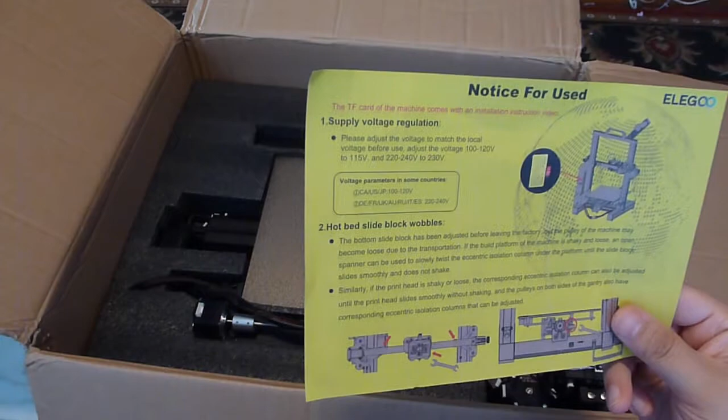Now this tells us about Elegoo's auto leveling for the Neptune 3. Notice for use: please adjust the voltage to match the local power use - adjust voltage 100 to 120, to 115 volts, or 220 to 240, to 230. So it's got an adjustment on the power supply. And it's telling you what happens if the hotbed wobbles and what you should do.

So here is the bulk of our 3D printer here. Let me just take a look at the user guide here and see what we're dealing with - precautions, machine parameters, and then you got your packing list here. We'll take a look at that.

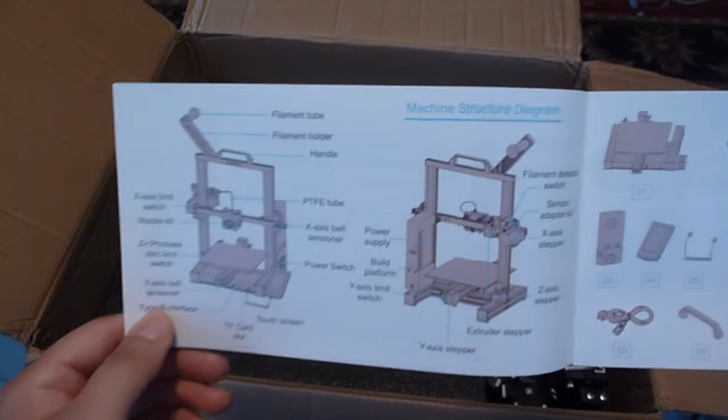Oh wow, they actually give you screwdrivers and Allen keys and everything. So I think everything I need here, other than the scissors to open the box, were included. And you'll see that's what it looks like when it's all put together. Hopefully it won't be that much of a pain to put together.

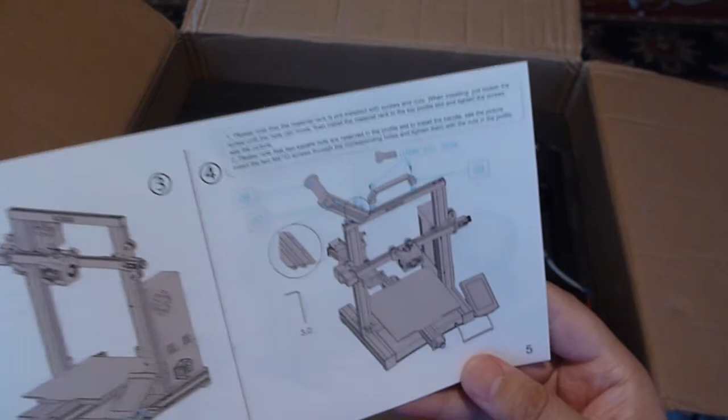Machine installation: the TF card of the machine comes with an installation instruction video. But it looks like before turning on the power supply, be sure to check the voltage, just like it said before. Yeah, it looks like we basically just have to put the top part on the bottom part, and then put the power supply on, put the screen on, and then the various other bits. So let's get to that right now.

So I'm going to get over here and see how we're going to take this out of the box. If I recall correctly from other videos I've seen on YouTube, this kind of has to be lifted out. Okay, that's a little moving bit that I didn't know about. Let's see, this has to be kind of lifted out, and then the foam has to be kind of taken out maybe. Okay, here we go.

Get this foam out of here, throw it over the side. And I think the rest of this just kind of lifts out like this. So you're going to put this on the couch here and get the box off the coffee table, and then we'll try to put our printer together. So get this over here - clean that up later. And behind the camera here, where you're not going to see, I'm going to try to get the rest of the printer out of this foam.

Maybe. Well, let's lean the top part - you're not seeing what I'm doing. Oh, okay, cool. So this is what we got.

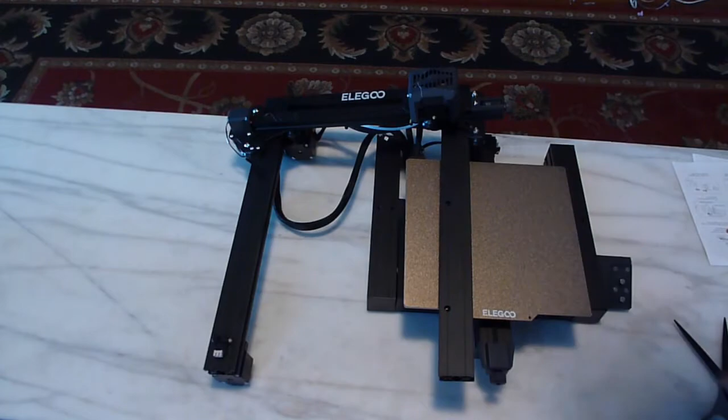And I'm going to look in the actual... let's see if there's anything here. I think that's everything, yeah, this is just a bunch of foam. Yeah, there's nothing on that. I just want to make sure there wasn't any extra little doors or anything on that.

Also, while I'm at it, I'll get the power supply out of that top foam block and throw that aside. Yeah, it looks like the power supply just connects with this little guy here, which I'm sure there's a matching one somewhere on the rest of the printer, so let's get rid of that.

Oh, I know what that was. That was the little block of foam from the thing, the little block of foam that was holding... I'm just gonna come down a little bit so I can kind of see what I'm doing here on camera. But the little block of foam that was holding in the screen kind of just fell out.

But we're gonna look at our accessory kit here, which I think holds just about all the screws and whatnot that I need to put this thing together with.

So here is your 3D printer filament sample. This is just 5 meters of white PLA. That's not much. A few zip ties.

Here is a metal putty knife. This is for like scraping your prints off the print bed.

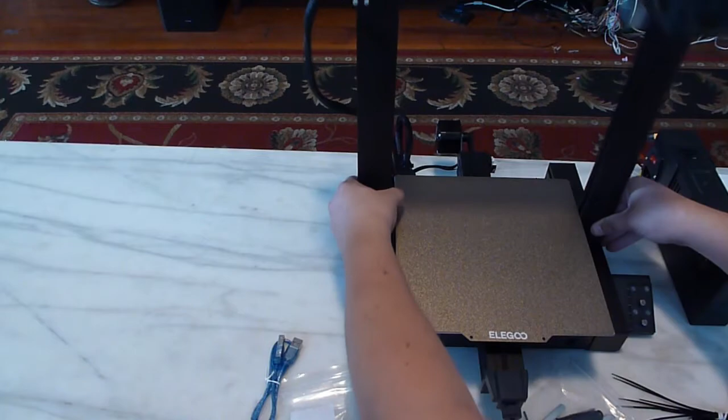And I seriously don't want to kill the thing my first time out, so I'm going to be very careful here. Because the last thing I don't want to do is have that whole assembly fall down and just break.

Yeah, I got this right because if you see in the manual here, it shows this bit here, and then that little knob there, and you see little knob there, this little bit here, and yeah, it looks like we got that all set up.

I don't know why this got a little bit of snot coming out of it. It's just a string, I guess. Okay, we're okay. Probably something in the manufacturing process, I guess.

So now let's just see what screws we have to use to put the thing together.

Okay, oh, I'm sorry, I didn't mean to bump you there, but... 4 pieces, HM5*45. So let's open up our little grab bag here and see which ones those are.

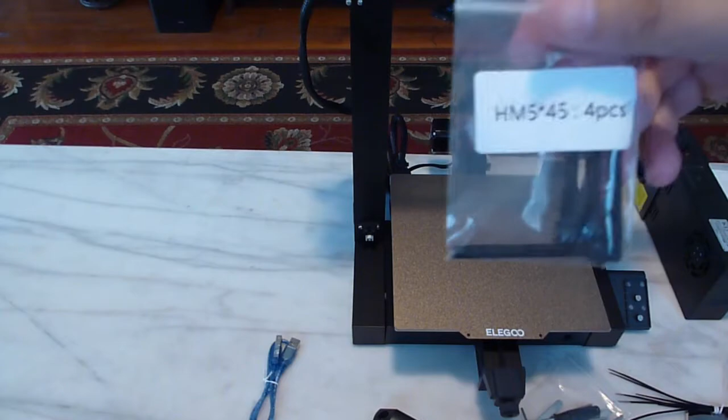Oh, I see, they actually have them bagged as to each step. So here is your ones for putting the printer together.

And let's do our best to do this and not totally ruin this thing before we get out here. So I think what I'll try to do is turn it on its side.

And let me just see which Allen key I'm using in this tool bag, which honestly, it's not common to buy something and actually get all the tools you need for it with it. Yeah, there we go, that one will do it.

So why is it all weird on the other side? I don't know, I guess it still works. Maybe it's just hard to get into the place.

And I know this area here is where the screen attaches, but that's just a little plug and it plugs into the thing. Oh, and on the front here is where the SD card goes. It's a micro SD card, I want to say.

So let's get this, I'm going to put it on the side like that. Get the whole deal here. And do the same. And just kind of see if I can get this together maybe.

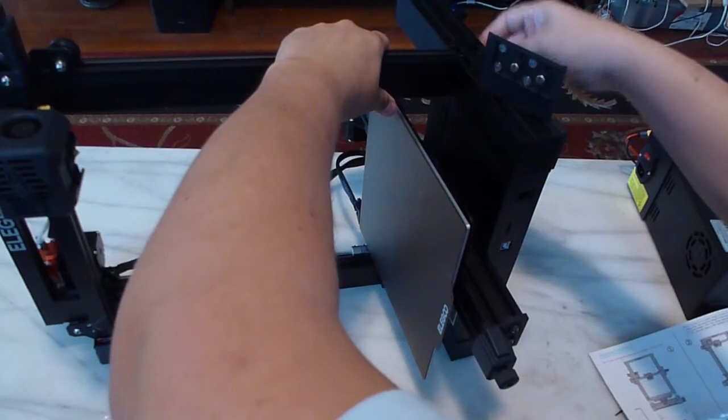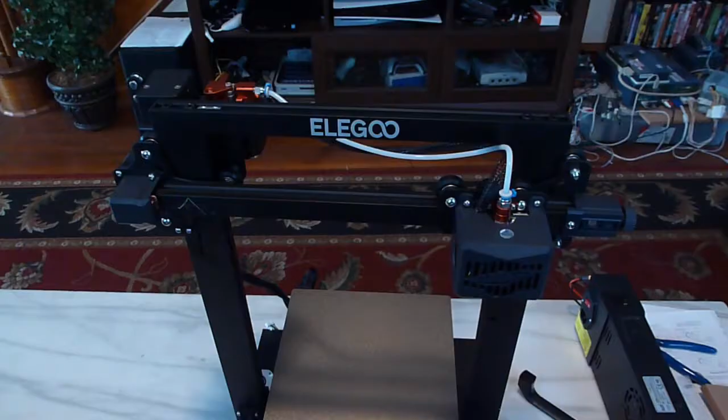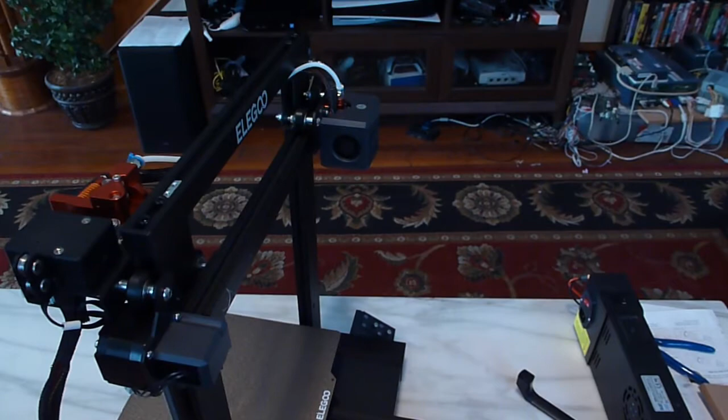Okay, now that I've gone ahead and tightened the screws for the frame off camera, I think we might be missing a rubber foot here or something. It just seems kind of... doesn't seem quite right. Maybe it's missing a rubber foot that came off, or maybe one of our cords is getting kinked. Let's see. Oh, okay. Yeah, now we're good. We're not sitting on anything.

Now, going from there, we have to take the power supply and put the 2 HM18s on. HM18s, I gotta find those somewhere here. Oh, here's the rest of our pieces. So we just get the bag that's 2 HM18s, which are these. Then you take this side here without the fancy servo gears and stuff, and that's where the power supply attaches. So it's here.

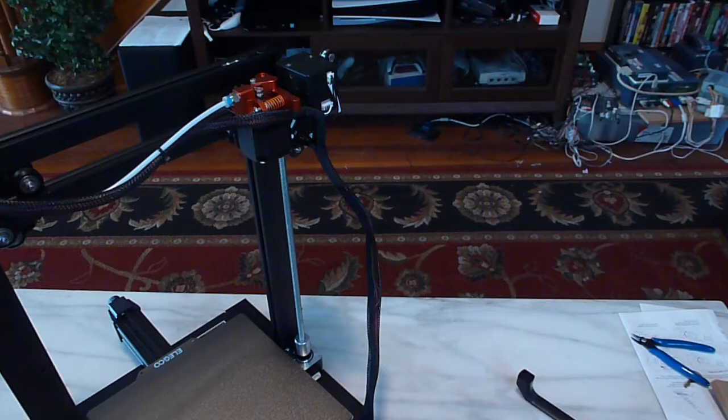Let me see what side of this actually attaches there. This is our power supply. Okay, it's definitely this side. Is it like this? Yeah, that's what it shows. So I guess you gotta have your power plug over there, and then this kind of just goes here.

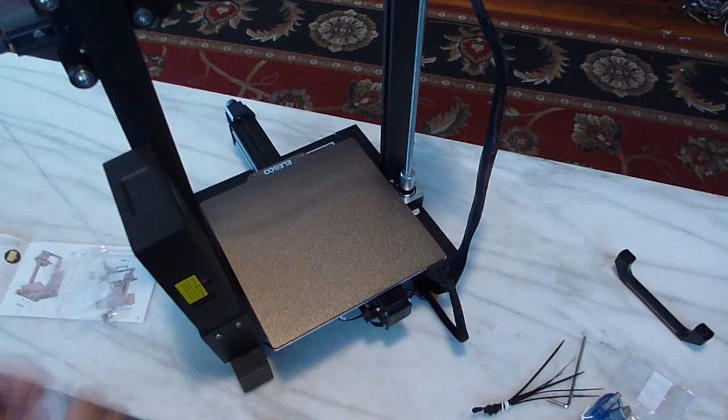And let me try to get those screws in. Hopefully it's not going to be such a problem like the beginning part was. But yeah, there's our power supply that I'm attaching now. This is probably going to end up being a very long video, and I'm probably gonna have to edit it down to multiple videos doing this. But let's see, put it through the thing here and see if it actually lines up with the power supply. See if these are this? No, different Allen key for those. Let's see if it's Allen key number 2. Yes, okay.

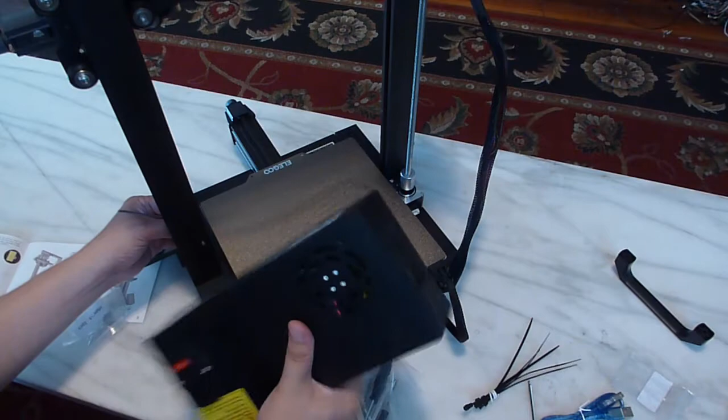And just put the screw in and hope that the screw hole actually lines up here. Okay, we actually got 2 of them here, but I'm guessing it's the further out one, because the further out one is on the top. So let's try to do that. I think I got it. Yeah, I definitely got it. And let's just get the other one in and we'll tighten them both up.

If I didn't drop the Allen key... wait, this doesn't seem right. Okay, well there are screws on the other side too. Let me just see if I'm doing this right. It looks right according to the picture. But let me just make sure I'm doing this right, because you don't want to do your initial assembly and end up doing it all wrong. So let's see if this screw goes in. Yeah, it does. Okay, got to do it right. Good.

Okay, so screwing in a power supply. And now the other screw, all the way in. Good. Now let's see what's next. Just following directions here because I don't want to completely mess this thing up.

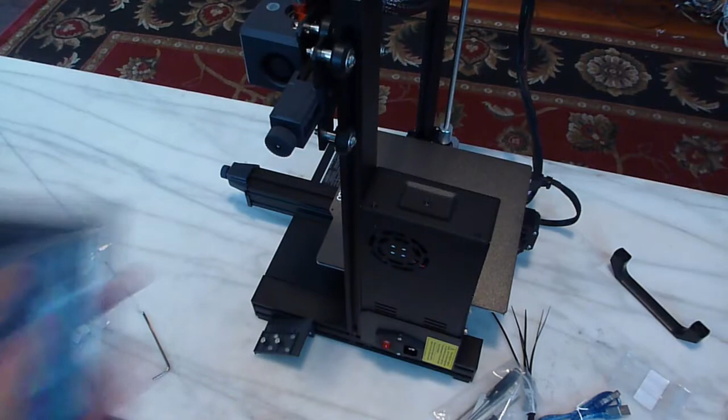Okay, now we just put on the touch screen. Here's our touch screen here, so all we gotta do is move the printer around here and peel off the little deal here. Put it in its cradle here. Is it? Yeah, it's down. In its cradle, and then plug it into like the phone cord thing here. And now that's installed. And what's next?

Okay, looks like now it's got me installing the spool holder and the handle. So here's our handle. And let me get those 2 pieces for the spool holder here. So here's our spool holder. And it looks like this bit goes like this. Let me see.

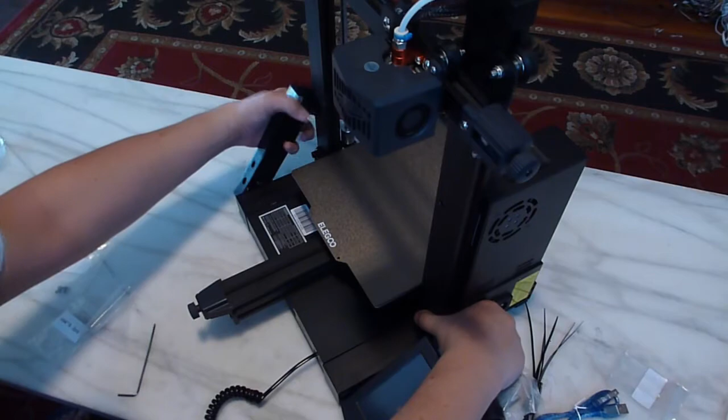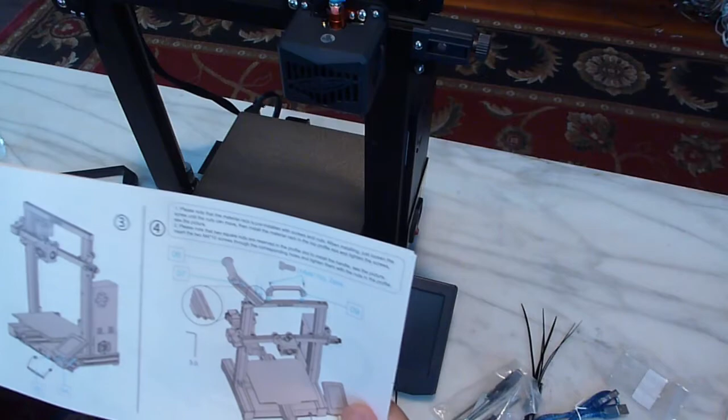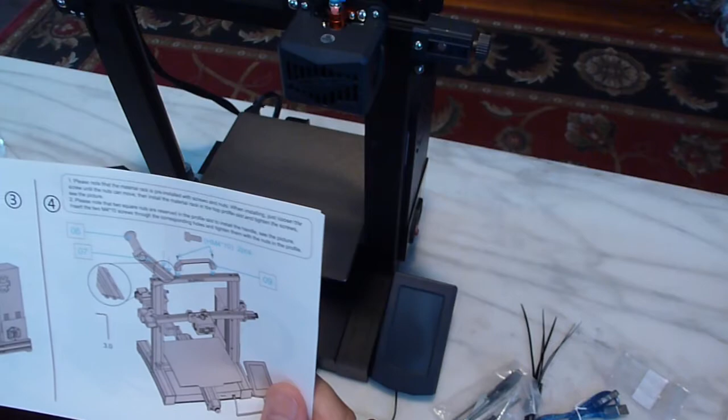I just want to make sure I'm doing this right, that's all. So we're gonna move this to the front. And what do we got to do here? It's got a bit of an actual instruction here. Please note that the material rack is pre-installed with screws and nuts. When installing, just loosen the screw until the nuts can move. Then install the material rack in the top profile slot and tighten screws as you see in the picture.

Okay, well let's get the handle first, because that's kind of easy. That's got our M4x10s here, M4x10s, here we go. That's probably the small Allen key, because, you know, why use 2 types of screws when you can use 3? Here, little screws here. So let's see. It's probably not going to be this one, right? No, it is. Okay, so let's look at the top of the printer here.

So, yeah. Oh okay, maybe those are your ones for the... and then what does this do? I don't get it, let me see. I'm just trying to understand what they're doing here. So it says here... I'm trying to understand, because I'm looking at the top of the printer. I see 2 screws on one side, 2 screws on one side, 2 screws on the other side, and then there's these like slidey nut things in there.

Please note that the 2 square nuts are reserved in the profile slot to install the handle. See the picture, insert 2... okay, so those little sliding nuts there are for the handle. So let's do the handle now, and then we'll figure out the other thing. So, handle goes here. And at least I can kind of see through that, so it's not going to be a struggle to get this on. So just 1 screw here.

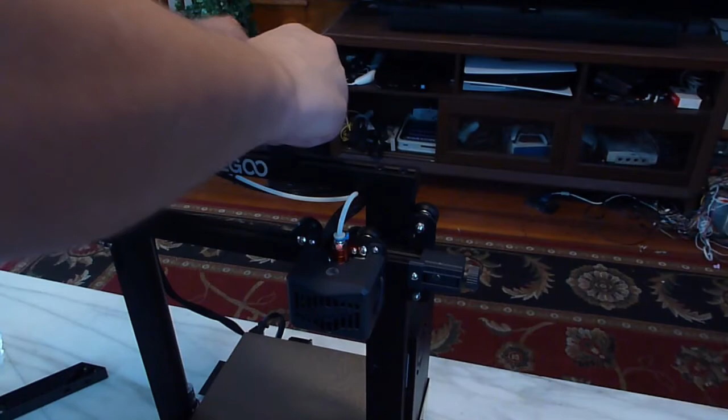Maybe... okay, yeah, it did catch. We'll loosen it up so I can move it a little bit and then get the other one in. Other one in, hopefully.

You'd think they would have had me attach all the cables and everything before I put the handle on. But hey, however they want to do it, I'm not going to tell them how to live their life. There we go, handle is on.

How in the world do I do this thing? Oh, I see, they're just having you, if you see these guys here, loosen those and put those in there. So let's go ahead and give that a shot.

Basically what these are is, if you remember when I put the handle in, it had these guys kind of sliding in there. So you basically have to loosen these, get them into the slot there, and then tighten them in, and that's how it works, I guess.

Why they didn't pre-install these in the slot like they did the ones for the handle, I don't understand, but hey, whatever you guys want to do is fine with me.

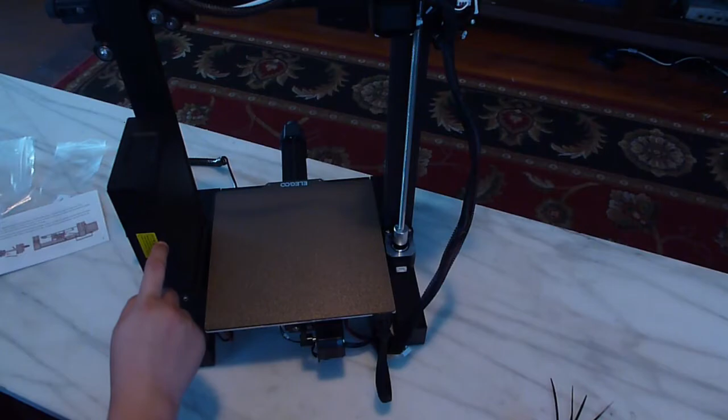Well, let me try using this. Maybe this will work. Yep, now it's got 115, so that works.

And let's see what we're supposed to do. Okay, so I gotta connect like a dozen cables here. First we're gonna connect the power cable here, which is fairly standard, that just goes like this. And it's showing about a billion connections, but that's the only one I see I gotta make.

Those are already connected. And let's see, there's a free cable kind of hanging out over here. I'm guessing that might go to the hotbed, but we'll see here.

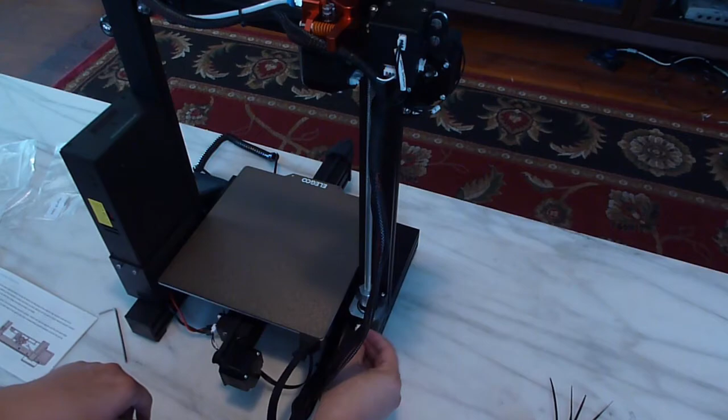Okay, let me see, because I do see that there. Oh, I see, this goes here on the actual frame here. There's an actual plug, so I'm going to plug that in there because it looks like that's where it goes. I don't know if that fell out in transit or if that was supposed to be pulled out, but that's all.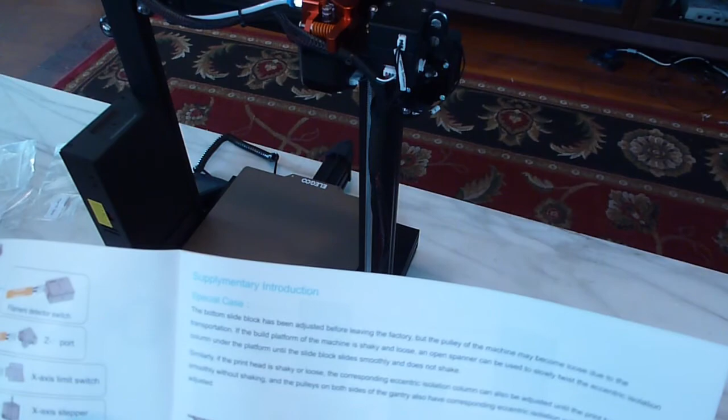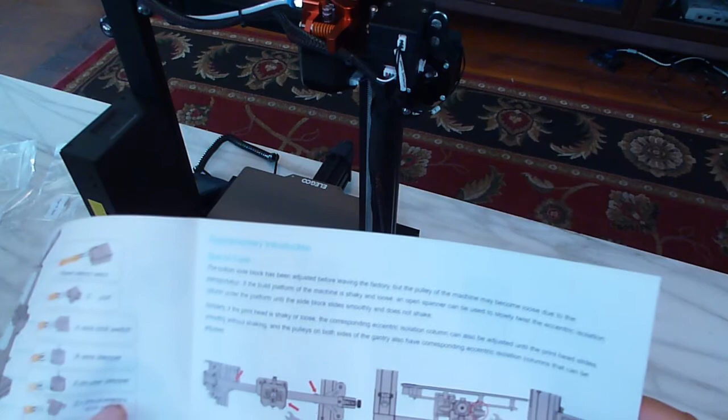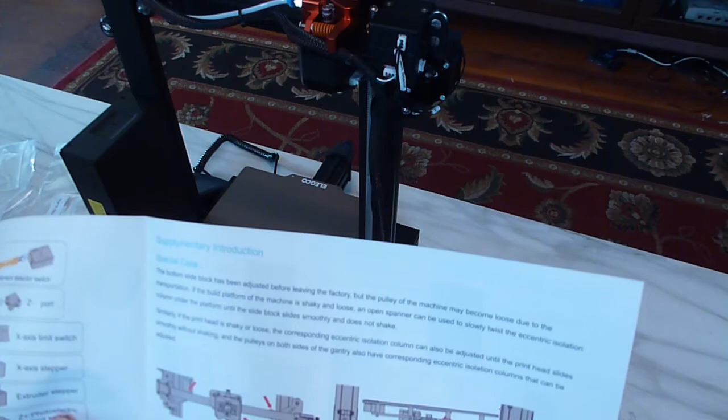Now, supplementary introduction: it says the bottom slide block has been adjusted before leaving the factory, but the pulley of the machine may become loose due to transportation. If the platform of the machine is shaky or loose, an open spanner can be used to slowly twist the eccentric isolation column under the platform until the slide block slides smoothly and does not shake. Similarly, if the print head is shaky or loose, the corresponding isolation column can be adjusted.

Okay, well let's see how everything moves, but I think we're pretty much in business here, so let's grab our newly installed handle here and just kind of give this whole thing a twist. There, now everything appears to be okay. So what do we do from here?

When first running the machine, the distance between the platform and the nozzle needs to be calibrated in leveling mode, which is about the thickness of an A4 piece of paper. When the machine is on, select level. The machine will enter a heating state. The nozzle is heated, the hotbed is 50 degrees centigrade. After reaching the preset temperature, each axis automatically returns to origin and starts the 16-point calibration. No other operations should be done until the nozzle returns to the home position.

Okay. Start printing.